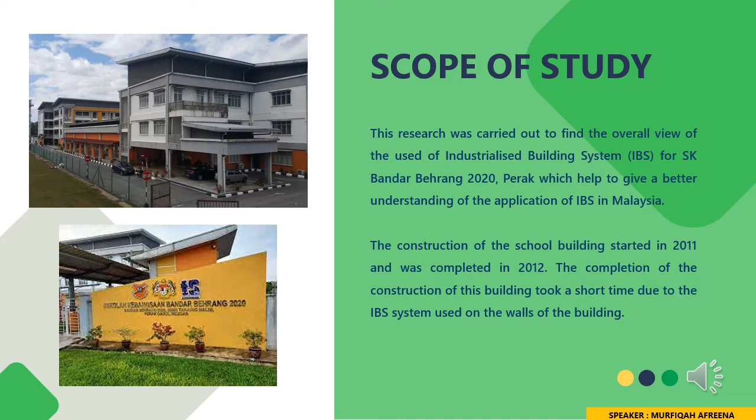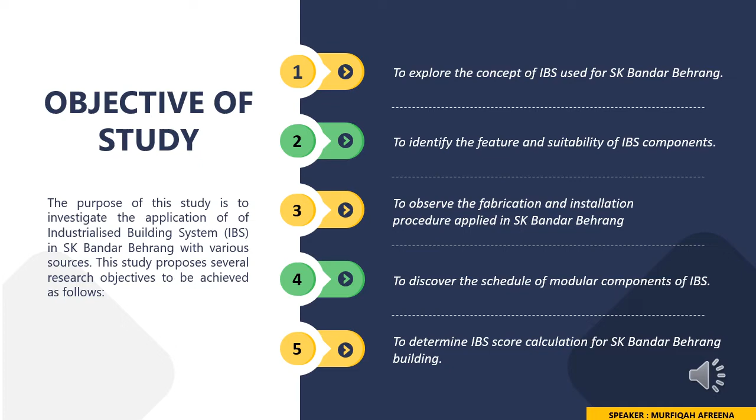The following are the objectives of the study. First, to explore the concept of IBS use for SK Bandar Behrang. Second, to identify the features and suitability of IBS components. Third, to observe the fabrication and installation procedure applied in SK Bandar Behrang. Fourth, to discover the schedule of modular components of IBS. And fifth, to determine the IBS calculation for the SK Bandar Behrang building.

Industrialized Building System. The IBS technique was utilized by Sekolah Kebangsaan Bandar Behrang to construct the walls in each of the school blocks. The block used for this report is a classroom block consisting of 4 levels, each with four classrooms. The following are examples of the components that are typically involved in an IBS structure installation plan.

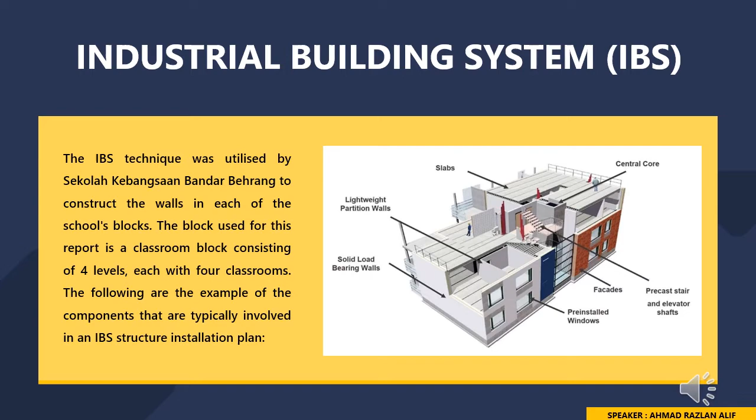Features of the IBS system. Number 1, better quality. Factory-controlled conditions and the use of cutting-edge manufacturing processes make it much easier to obtain the appropriate dimensions, forms, colors, and texture of precast concrete in precast construction. Number 2, design freedom. Custom-made solutions and the intelligent use of industrialized manufacturing methods can result in a diversity of expression and distinctive buildings.

Number 3, economic advantage. The pace of construction might enable businesses to save even more costs. While foundation and site works are being completed, component production can proceed. They can then be easily assembled on a job site. Number 4, manpower saving. Especially important for construction companies that are experiencing a labor crisis due to the rapidly decreasing pool of skilled workers obtainable from conventional sources.

Number 5, neater and safer sites. The usage of precast concrete and other prefabricated components during construction will assist in reducing wastage of material. The removal of formwork, scaffolding, and wet trades allows the construction site to be cleaner, neater, and more structured.

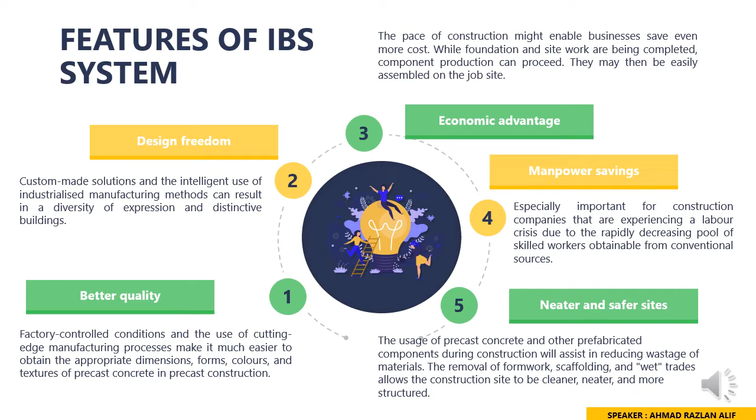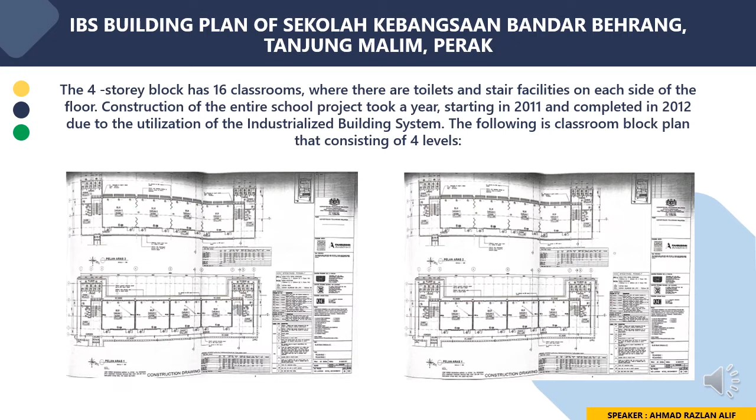IBS Building Plan of Sekolah Kebangsaan Bandar Behrang, Tanjung Malim, Perak. The 4-story block has 16 classrooms, with toilets and stair facilities on each side of the floor. Construction of the entire school project took a year, starting in 2011 and completed in 2012, due to the utilization of the industrialized building system. The following is the classroom block plan consisting of 4 levels.

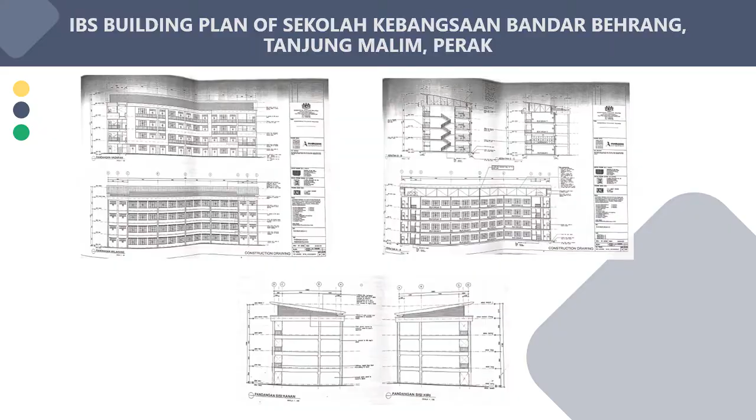The next one is application of IBS system. The IBS component that we use in the school is precast concrete wall. The suitability of this precast concrete wall is it consists of fire resistance that will provide safety to the building occupants. The walls do not need any maintenance, but the connections, sealants and accessories need to be maintained regularly.

There are 2 types of connection details. The first one is bolt connection and the second one is the cast in situ connection.

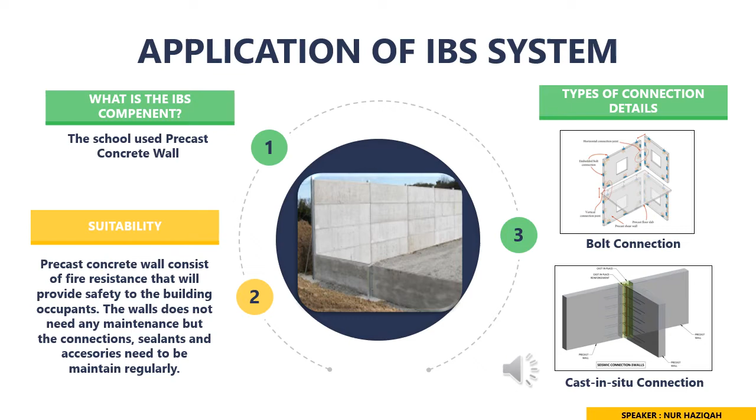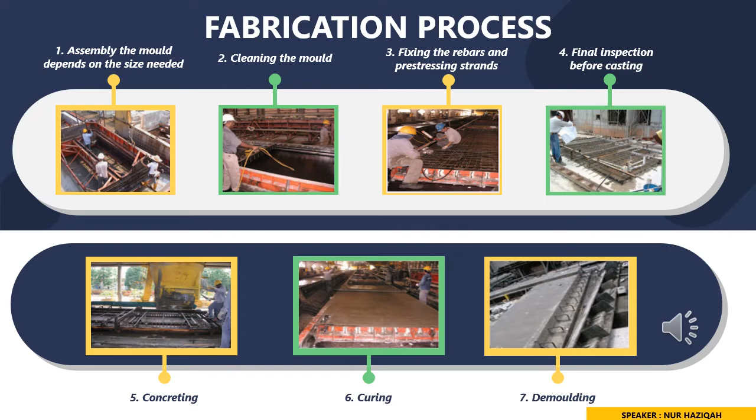There are 7 steps of fabrication process for precast concrete wall. The first one is the workers need to assemble the mold depending on the size needed. They need to clean the mold to prevent any debris or dust. The rebars and prestressing strands need to be fixed, and a final inspection done before casting. Next, the workers can start concreting the mold, then curing, and lastly, demolding the precast concrete wall.

Next is the installation process. The first process is setting out, setting a reference line and offset line for the area to put the concrete wall. Next is mobilization. After inspecting the area's alignment and verticality, lift the concrete wall to its specified spot using crane. And the third one is the connection. The panels can be connected to other panels by using bolt connection or cast in situ connection.

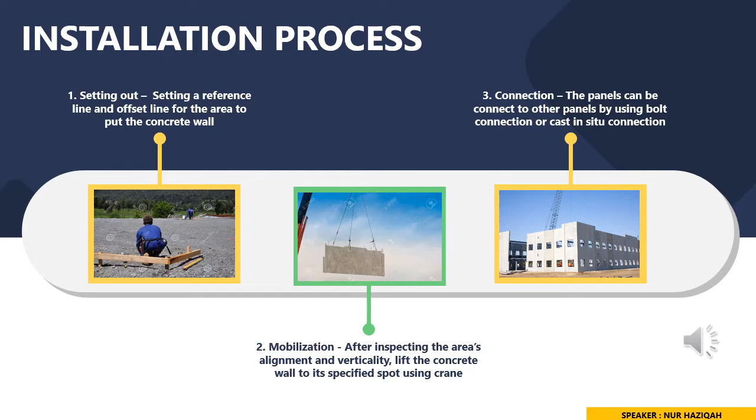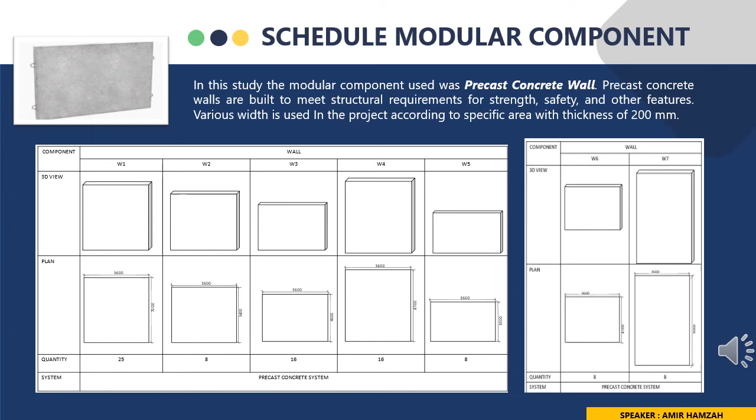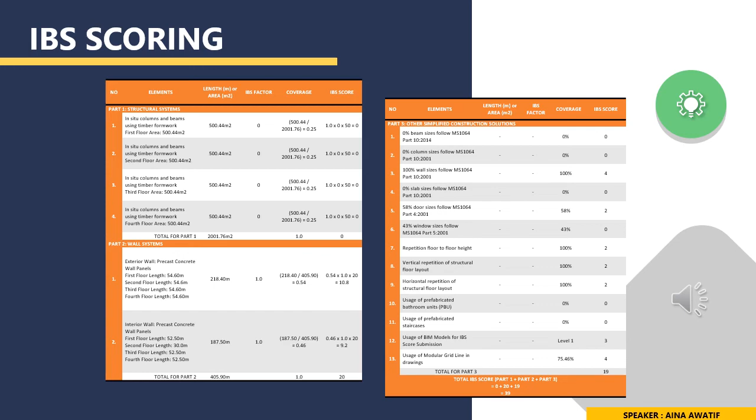Next, part 3 shows other simplified construction solutions. The data about coverage of IBS use had been inserted and the total IBS score in part 3 is 19%. Then after we total the summation of IBS scores in these 3 parts, the final total IBS score is 39%.

In conclusion, the application of the industrialized building system IBS in residential and non-residential buildings is getting proper recognition from year to year. In this case study, it was done at Sekolah Rendah Bandar Behrang 2020 in Perak, and the component of IBS that has been installed was precast concrete wall panel with 200 mm thickness concrete block.

The IBS scoring calculation shows that in structural systems, there is 0% of IBS score, but in wall systems, there is 20% of IBS score, together with other simplified construction solutions that make 19%. The total IBS score in this building is 39%. It can be increased by using some precast components in the structural system. A higher IBS score in a building is a reflection of a reduction of site labor, lower wastage, less site materials, better quality, safer construction site, faster project completion as well as total construction costs.